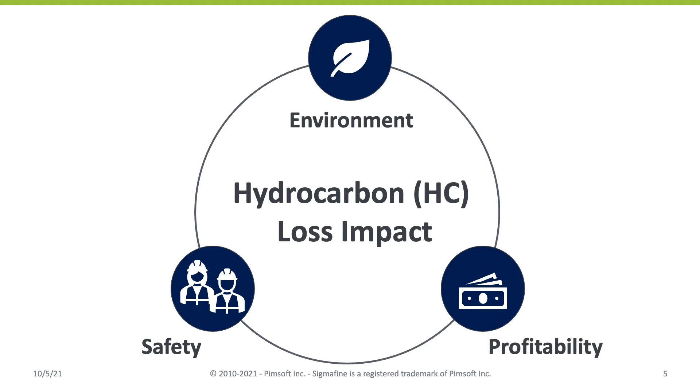Hydrocarbon loss accounting is quite an evergreen topic. Losses have a significant impact on the environment due to undesirable emissions, on the safety of the people operating in the plant, as leaks can cause not only exposure to noxious materials but can also be the cause of accidents, and last but not least, on the profitability of a production process.

Regarding that last point, it has been estimated that a loss reduction program can bring savings in the range of $2 to $10 million for an average size refinery.

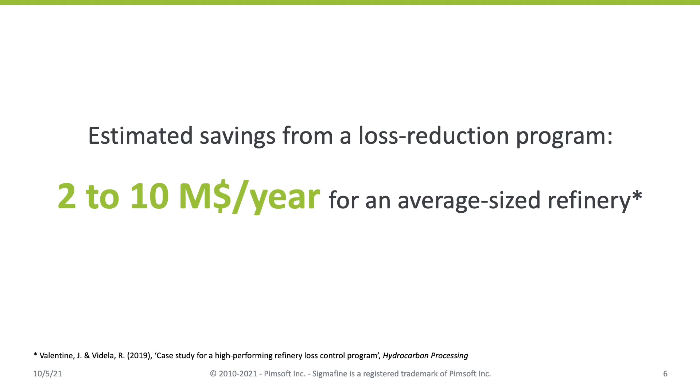Moreover, thefts, one of the most obvious forms of leaks, are heavily affecting the oil and gas industry worldwide. Very famous is the case of Shell's Singapore refinery, where thefts have involved several levels of the company and for many years to reach the amount of $150 million. Ernst & Young estimated that worldwide around $133 billion worth of crude and refined product are stolen or adulterated every year. Quite an impressive figure. Now I leave the word to Marco.

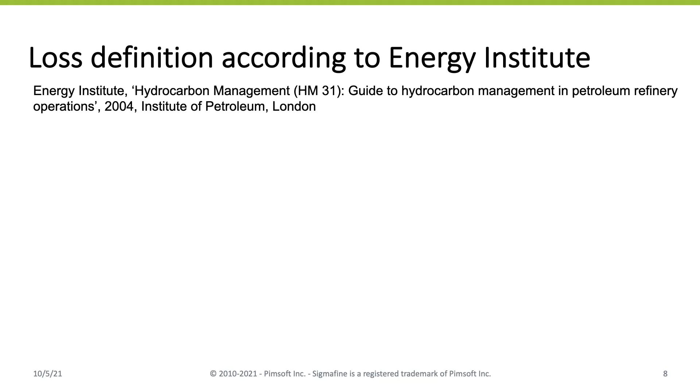We have identified already some important reasons why we should care about refinery losses. But what do we mean by loss? In this presentation, we will always refer to the definition and approach given by the Energy Institute, and more specifically to the HM31 guidelines. If we analyze a facility, on one side we have the inputs consisting of the process inputs.

These inputs consist of receipts, imports, and the changes in the inventory of the feedstocks. On the other side, we have the outputs, which can be divided into dispatch products, the fuels used as internal consumption, and the change in the product inventories. The difference between the two sides are the total losses of the refinery. Later, we will analyze them in more detail.

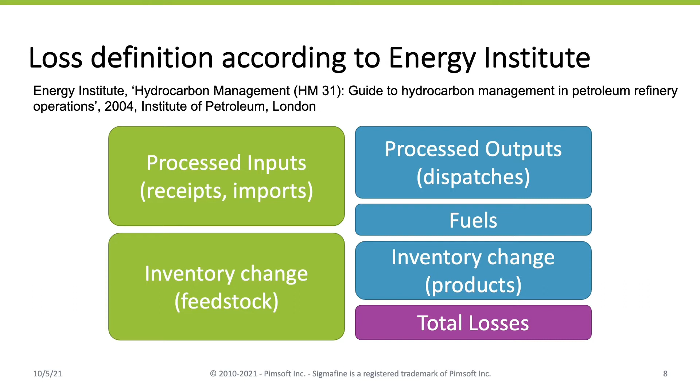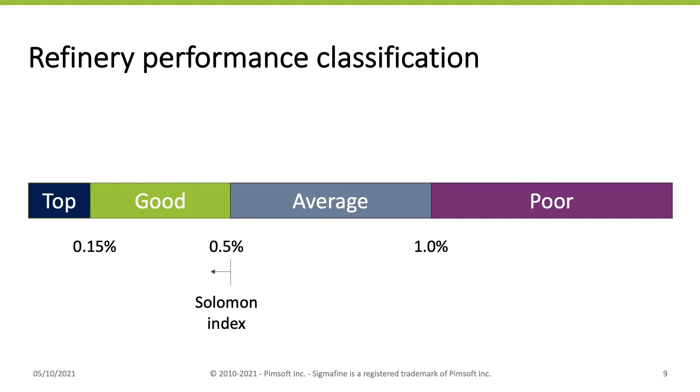Here we represented a qualitative indication of the performance of the refinery based on the amount of total losses. Don't take these figures as written in stone; still, they can give you a rough idea of where you are. The Solomon Index suggests 0.5% being the threshold below which a refinery should stand for a good performance.

But losses, of course, fluctuate over time. Here, a statistical analysis based on a data set of 36 monthly data points, so 3 years, is provided in this trend together with its corresponding normal distribution. If the expectation is to reduce the losses by an amount which is half the current standard deviation, this would translate into a benefit of $1.5 million, considering a 100,000 barrels per day refinery and a crude price of $75 per barrel.

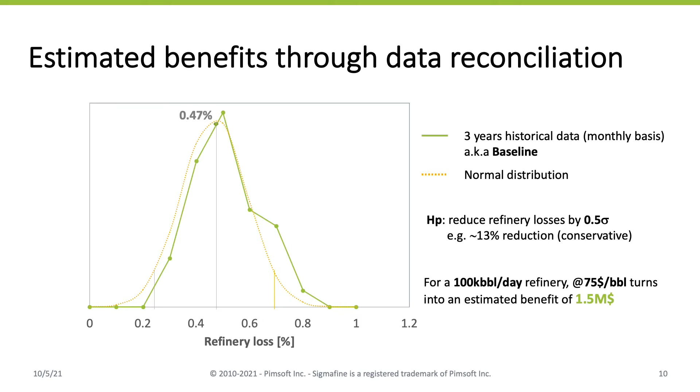Again, this is the benefit you might achieve by applying data reconciliation without taking into account changes in instrumentation. How is this possible?

Well, the procedure starts by taking into consideration the total measured losses, which can be divided into accountable losses—the ones that you can directly measure, like flares, or that you can reasonably estimate, such as correlations for evaporation from tanks.

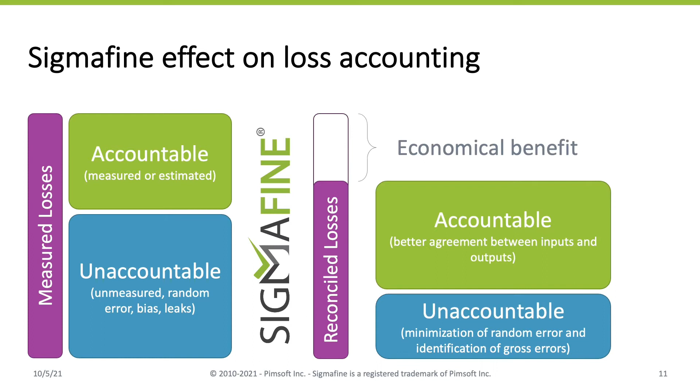Sigmafine reduces the inconsistencies between the inputs and the outputs, and at the same time reduces the uncertainty in the data. Therefore, it can have a double action both on the accountable side and the unaccountable losses. The total loss reduction turns into the economic benefit that you can claim.

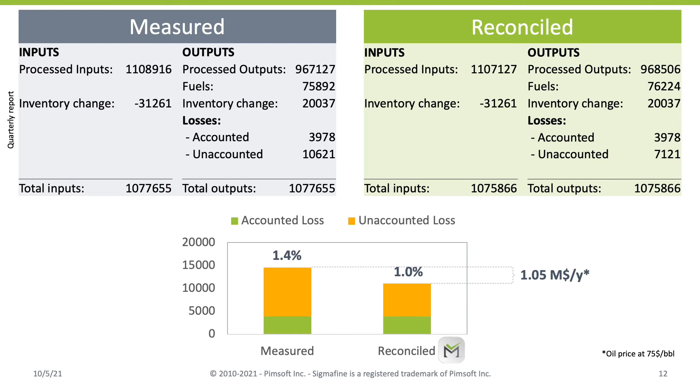Furthermore, it should be noticed that the uncertainty associated to the total loss figure has also been slightly reduced, as the histogram clearly shows. The applied formula for the calculation of the overall loss uncertainty is again the one provided in the guidelines of the Energy Institute. Just to translate it into words, it's the square root of the sum of the squares of the contribution of each single uncertainty associated to the corresponding loss, the terms according to the accountable and the terms according to the unaccountable loss.

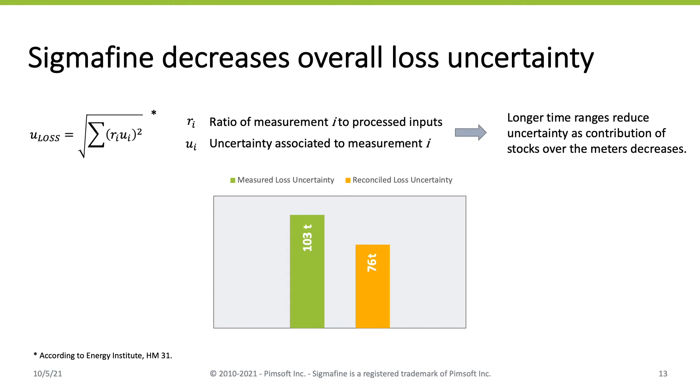Now, if you want to start a loss reduction program, these are the suggested steps to be implemented, considering that this is an iterative process for continuous improvement. First of all, an analysis of the current status of the plant losses needs to be performed, taking into account a history which should be not less than 1 year. This will result in the creation of a baseline, a potential target, and a set of actions to be taken, both in terms of balancing and choice of instrumentation.

The Sigmafine model will need to be adapted in order to support the loss accounting step, and the production also of a related report like the ones we have seen before. After running the balance for a few months, the results need to be assessed compared with the initial baseline, and again, actions taken based on the new results. After 1 year, a new baseline can be created, and this can be compared to the original. From the comparison between the older and the new baseline, the overall benefit can be calculated.

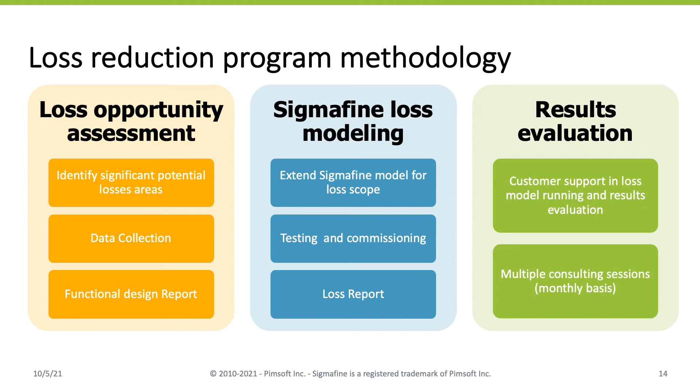We said that Sigmafine models need to be adapted. In which way? Well, moving from production accounting to loss accounting requires shifting the focus. In terms of time range, we understood already, typically we need to move from a daily to a monthly procedure. We need to feed the new monthly case based on the daily cases which were previously run for production accounting, so we need to aggregate original reconciled daily case values into overall monthly data.

The same aggregation needs to be done with tolerances, so we can start with the reconciled tolerance of the daily cases and average them over the month. Regarding the tank stocks, instead of taking the opening and closing at the start and end of the day, we need to do the same at the start and end of the month. The tank tolerance is typically set to 0 for fiscal reasons. Such constraint is not anymore that valid for the loss accounting reason, so it can be decided, it's a user decision, if keeping the tolerance of the tanks at 0 or setting such tolerance as a percentage of inventory change.

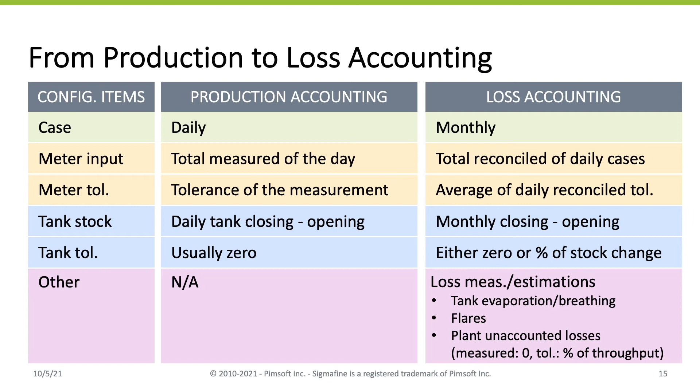Now, let's analyze in more detail how some of Sigmafine's functionalities can improve the balance and help reduce the losses.

One of the biggest sources of gross errors is the misdeclaration of movements. Sigmafine diagnostics help identify major imbalances around nodes and inventories, thus precisely highlighting where some of the movements could be missing. If you want a more comprehensive approach, there is also a dedicated application, such as the Sigmafine Intelligent Movement Management, which makes the declaration of movement and the real-time monitoring of inventory change versus active movements available to the operators. So it's easier to detect if something is missing, is not declared, or, for example, you see an inventory change, but no movements declared to that specific tank. And so we decrease the level of human errors and consequently also the impact both on the daily production accounting and on the loss accounting.

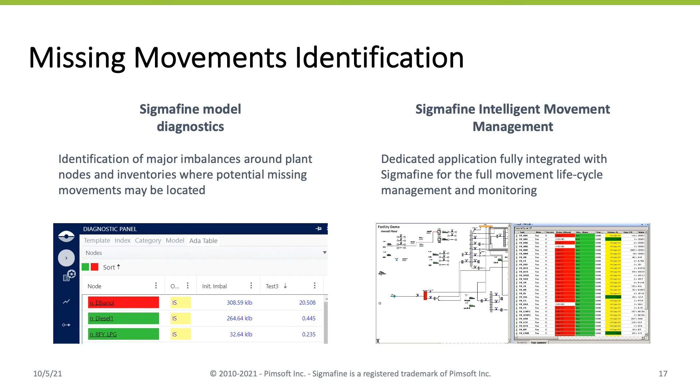Another source of gross error is related to the conversion from volume-based measurement of the crude. One issue is related to the density, which might not be adequate enough. Composition and quality tracking algorithms can take care of the different blends of crude stored in the crude tanks and used as feed to the refinery. So we can improve the estimation of the density, and this is done day by day, and then you can have an aggregated monthly figure.

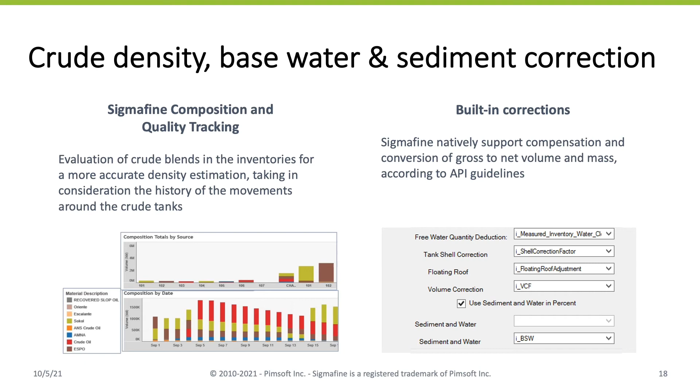The second error is related to the overestimation of the amount of measured crude due to the water and sediment which is mixed together with the crude before the desalter. Sigmafine, for that purpose, has built-in corrections to take care of the information regarding the amount of water and base sediment and to automatically correct the amount of hydrocarbons.

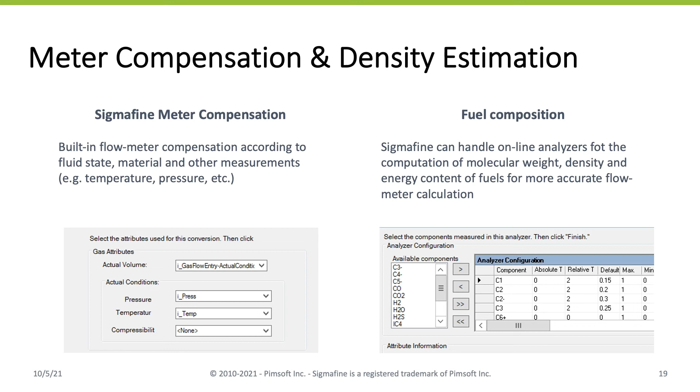Similar actions can be taken also on compensation of measurements, especially orifice plates, in order to correct the initial raw data with pressure, temperature, why not even compressibility factor of the gas if it is available. For the fuel flow rate calculations, which is one of the important terms used for the output calculations, if you have an online gas chromatograph, or even periodic sampling done from the laboratory, Sigmafine can use such information to compensate with the actual molecular weight.

Although this presentation is mainly focused on the data reconciliation impact in a loss reduction program, we cannot overlook the effect of measurement devices, which on the long run accounts for a major part of the benefit when the performance baseline especially is poor. So we thought to just summarize briefly the best practices in different critical areas.

Starting with the crude, using Coriolis flow meters for crude measurement means having a direct mass measurement instead of a volume-based measurement, with the additional possibility of getting density information. This has really a relevant impact on the quality of the measurement of the input feedstock.

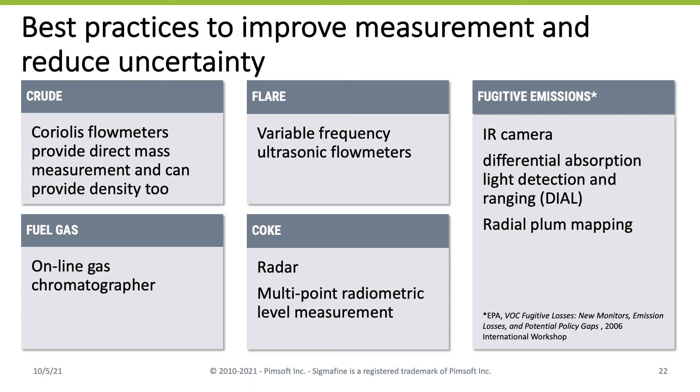Back to Gabriele, who will present some use cases. Thank you.

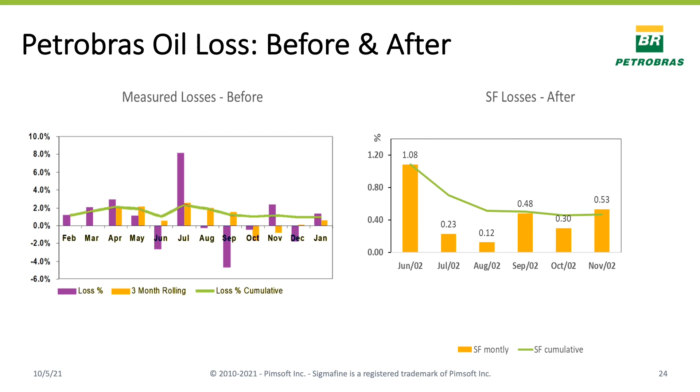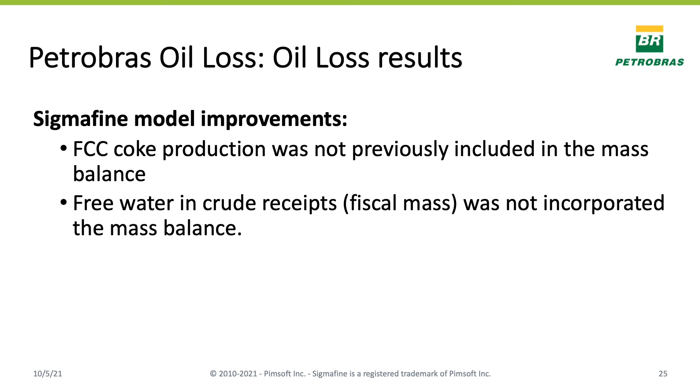Thank you, Marco. The first use case comes from Petrobras. After using Sigmafine to support their loss reduction program, Petrobras was able to reduce losses from above 1% to 0.5%. Some of the improvements dealt with the inclusion of FCC coke production and with the compensation of free water in crude. Here are some of the main benefits they reported, which cover many of the areas we talked about before, such as density and volume to mass conversion, but also improvements from an organizational point of view.

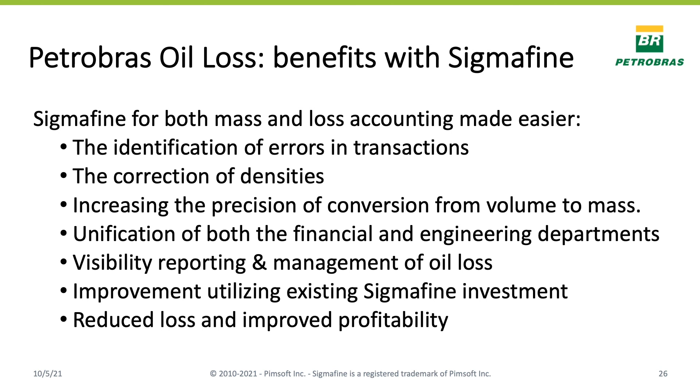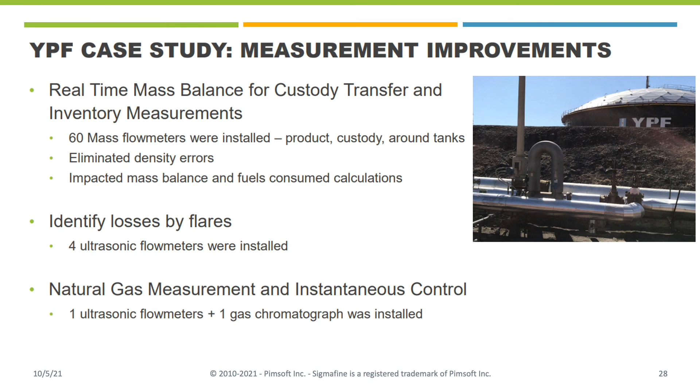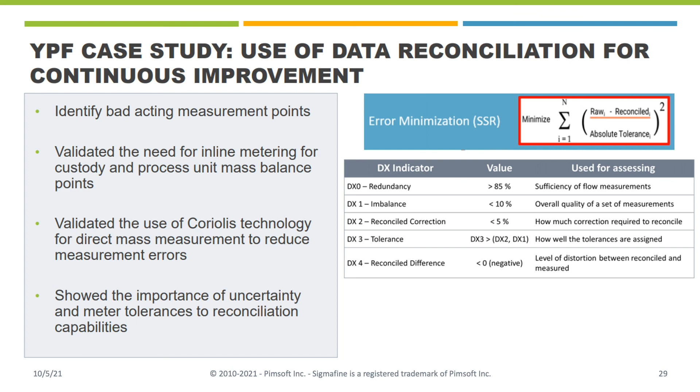The second use case was presented by Emerson at the Sigmafine Summit 2020 and regards the YPF refinery in Argentina. A full study was conducted and several improvements both on the balance and on instrumentation were applied, including the installation of best-in-class measurement devices. The improved instrumentation resulted in higher accuracy of the data used as input to the balance, where the same measurements were validated by the reconciliation approach. The reconciliation indicators highlight the status of the model and the overall quality of the measurements, supporting the selection process of the measurement devices.

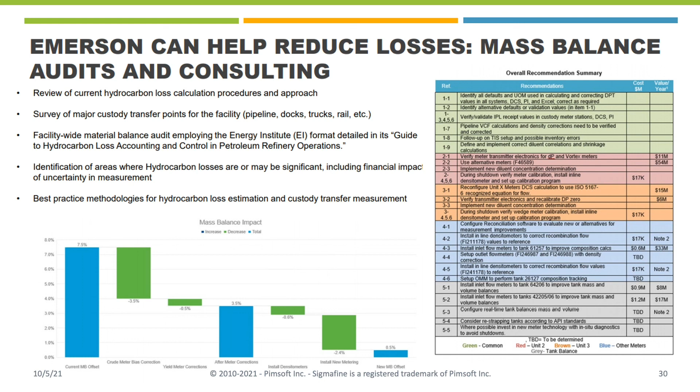The baseline was very poor, showing an initial imbalance of 7.5%. Measurement compensation greatly improved the balance with a 4% reduction. An additional 3% reduction was achieved by installing new meters, bringing the imbalance down to 0.5%.

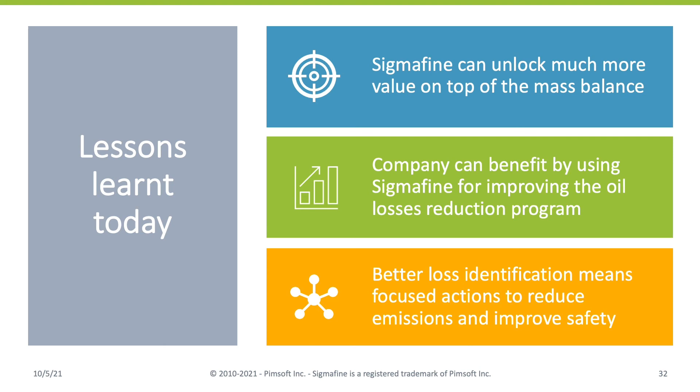So today we learned that Sigmafine can unlock much more value on top of the mass balance. A company can benefit from using Sigmafine to improve its oil loss reduction program, and better loss identification means focused actions to reduce emissions and improve safety and profitability.